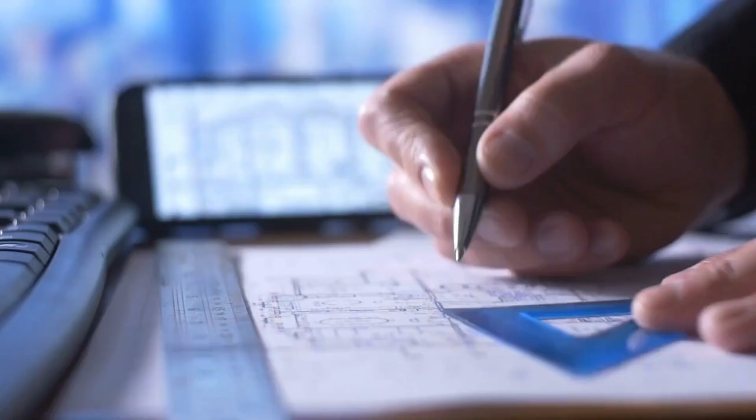Louis Sullivan, an American architect, was the first to popularize the idea that a building's form should be determined by its function. He believed that a building's purpose and intended use should guide its design, rather than just aesthetics.

Take the Guggenheim Museum in New York City, for example. Its unique design was intended to provide a space for visitors to view artwork in a continuous, uninterrupted flow. The building's spiral design allows visitors to walk up and down the ramps without ever having to turn around or backtrack.

Similarly, the Sydney Opera House, designed by Danish architect Jørn Utzon, was created to provide the best acoustics for the audience in its performance halls, rather than just focusing on its aesthetic appeal. The shells, which are the most iconic part of the building, were designed to ensure that sound was reflected evenly throughout the auditorium.

Another example of form following function can be found in hospital buildings. Hospitals have very specific needs, such as separate entrances for ambulances and patients, as well as specialized equipment for medical procedures. The design of a hospital must take into account these needs, while still providing a welcoming and comforting environment for patients.

The Mayo Clinic in Rochester, Minnesota, is a prime example of a hospital building designed with its function in mind. The clinic's design focuses on creating an environment of healing and wellness for patients, as well as providing the necessary medical equipment and resources for staff. The spacious lobby is designed with natural lighting, comfortable furniture, and calming artwork to reduce patient anxiety and promote relaxation.

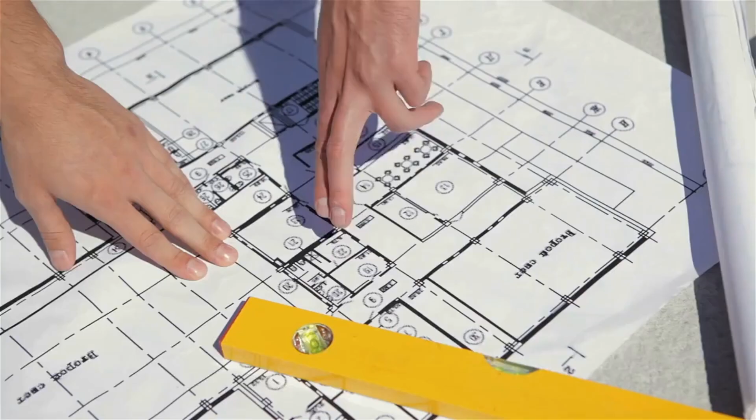In contrast, a poorly designed house may have awkwardly placed rooms or doors that don't align with the flow of the home. This can lead to a feeling of disjointedness and make daily life less efficient and enjoyable.

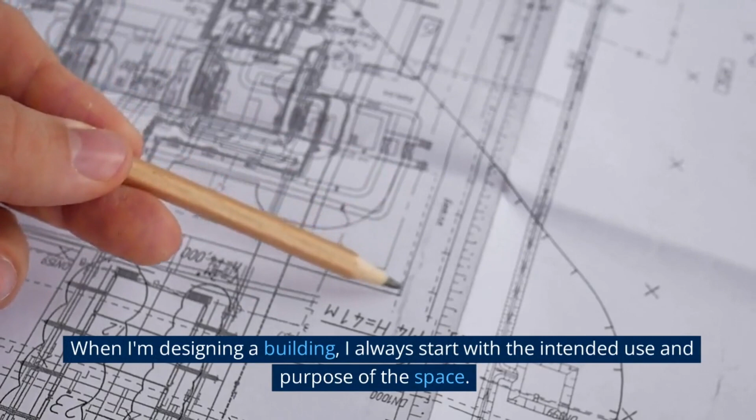Form follows function is really at the core of good design. When I'm designing a building, I always start with the intended use and purpose of the space. From there, I can begin to think about how the space should be arranged and what materials would be best suited for the project.

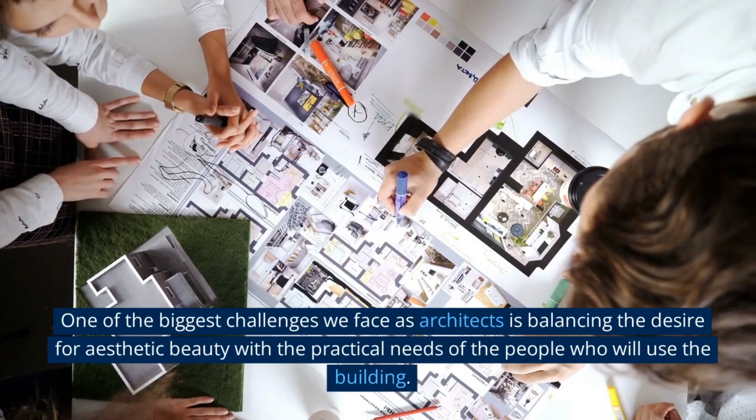One of the biggest challenges we face as architects is balancing the desire for aesthetic beauty with the practical needs of the people who will use the building. It's a delicate balance, but it's essential to create spaces that are not only visually appealing, but also functional and efficient.

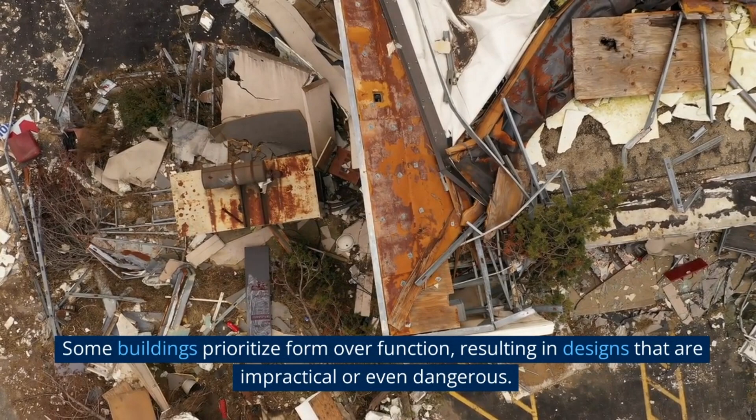Of course, not all architects adhere to the principle of form follows function. Some buildings prioritize form over function, resulting in designs that are impractical or even dangerous. However, it's important to note that form following function does not mean sacrificing aesthetics. In fact, a well-designed building that prioritizes function can often be more visually appealing than one that does not.

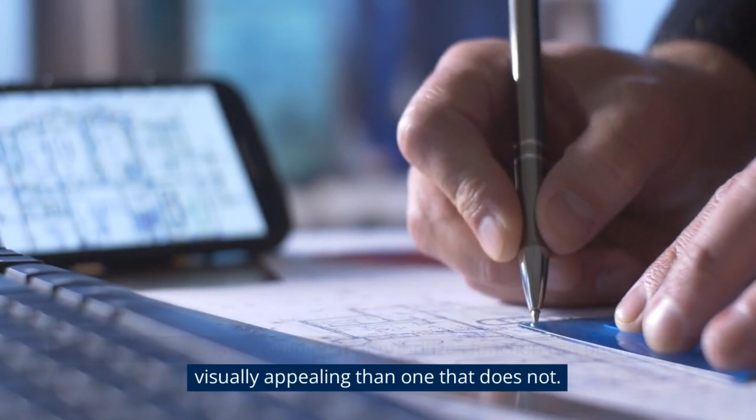By understanding the needs of the space and its users, an architect can create a design that is both beautiful and practical. When you look at a modern building, what do you see? Is it just a structure made of concrete and steel, or is there something more to it?

But first, let's take a step back in time. For centuries, buildings were designed to be not only functional, but also ornate and decorative. Architects would create intricate facades and elaborate interiors to show off their skills and impress their clients.

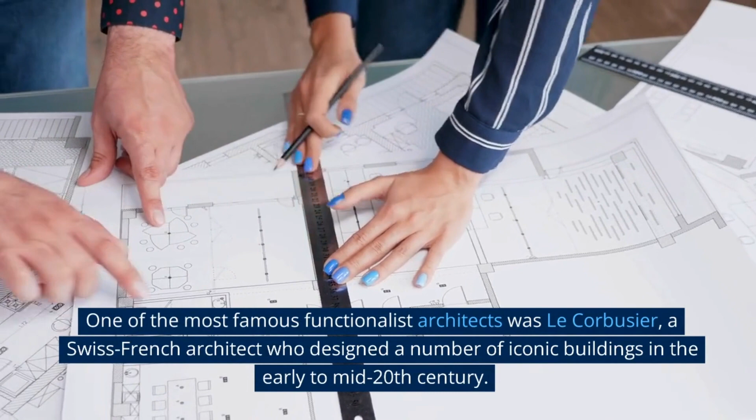But in the early 20th century, a new approach emerged. Functionalism, also known as the International style, emphasized the use of simple forms and industrial materials to create buildings that were efficient, practical, and affordable. One of the most famous functionalist architects was Le Corbusier, a Swiss-French architect who designed a number of iconic buildings in the early to mid-20th century.

His designs were characterized by clean lines, open spaces, and the use of industrial materials such as reinforced concrete and steel. One of the key principles of functionalism is the idea of open space.

Rather than dividing a building into separate rooms and compartments, functionalist architects preferred to create large, open areas that could be used for a variety of purposes. Another important element of functionalism is natural light.

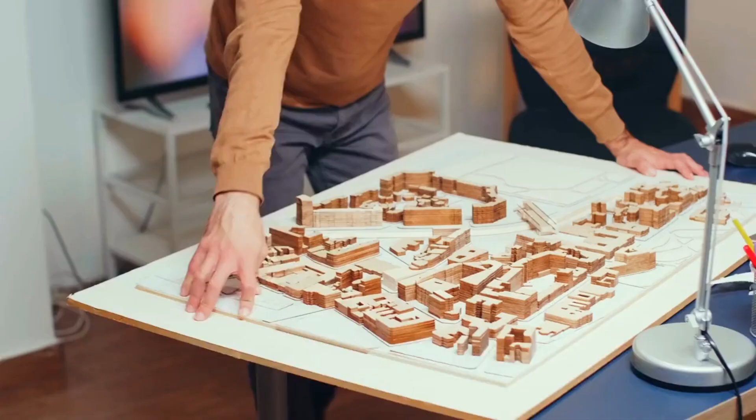By using large windows and skylights, architects could bring in plenty of natural light, reducing the need for artificial lighting, and creating a more pleasant and comfortable environment. Functionalists believed that architecture could play a role in improving society by creating buildings that were better suited to modern life. Flat roofs are also a hallmark of functionalist architecture.

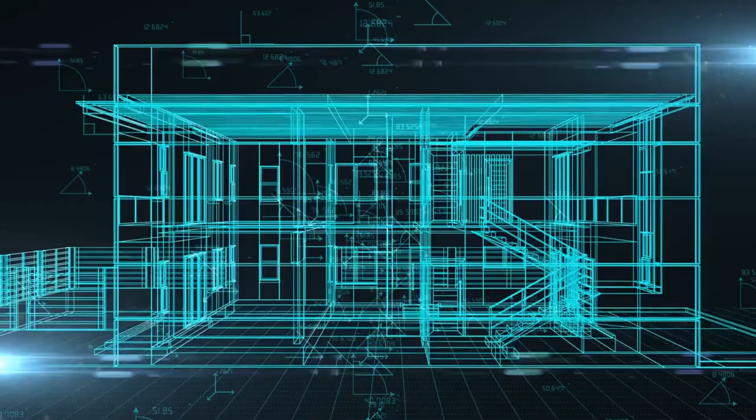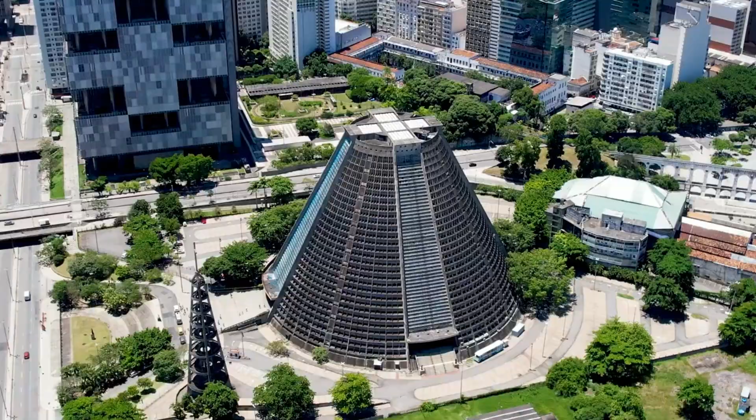By eliminating traditional pitched roofs, architects could create more usable space on top of the building, as well as a more streamlined and modern appearance. Functionalist architecture is characterized by a minimalist aesthetic. Rather than using ornate details and decorations, functionalist architects preferred to let the building's structure and materials speak for themselves.

From open space to natural light to minimalist design, these ideas have had a profound impact on the way we think about buildings today. Postmodernism emerged in the late 20th century as a response to the perceived limitations of modernism, which was characterized by a focus on functionalism, simplicity, and a rejection of ornamentation. Postmodernism sought to break free from these constraints and embrace a more eclectic and playful approach to architecture. Postmodern architects were inspired by a wide range of styles and historical periods, and they often combined elements from different styles in unexpected ways. Postmodern buildings are often characterized by their use of color, ornamentation, and historical references.

One of the most famous postmodern architects was Robert Venturi, who argued that less is a bore, rejecting the modernist belief that simplicity was the key to good design. Venturi and other postmodernists sought to create buildings that were more expressive, playful, and accessible to the general public.

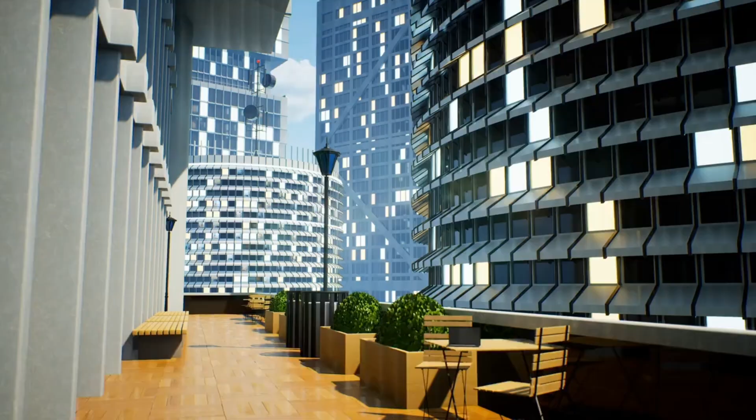Postmodernism had a significant impact on architecture in the late 20th century, and its influence can still be seen in many buildings today. Postmodernism challenged the notion that there was only one right way to design a building, and it opened up new possibilities for architects to explore different styles, materials, and forms.

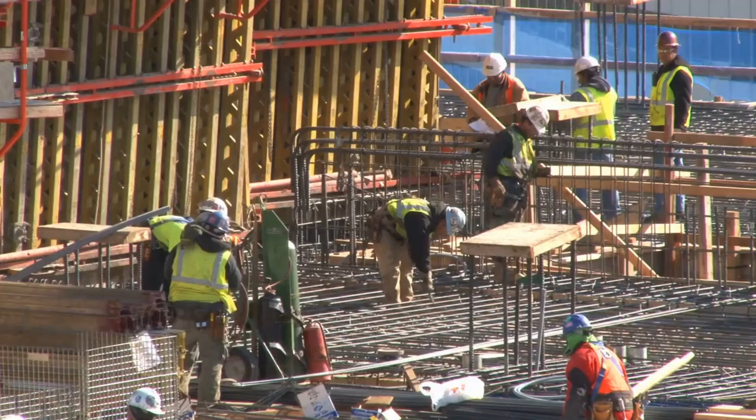However, postmodernism also attracted criticism from some architects and critics who saw it as superficial and lacking in substance. Some argued that postmodernism was too focused on aesthetics and failed to address the social and environmental issues that architecture should be concerned with. Despite these criticisms, postmodernism remains an important movement in architecture, and its legacy can be seen in many of the buildings that define our cities today.

Whether you love it or hate it, there's no denying that postmodernism has had a significant impact on the way we think about buildings and the built environment. Postmodernism had a significant impact on architecture in a number of ways. Here are a few of the key ways in which postmodernism affected architecture.

A renewed focus on aesthetics. Postmodern architects rejected the idea that architecture should be purely functional, and instead emphasized the importance of aesthetics and visual appeal. Postmodern buildings often feature bright colors, playful shapes, and decorative elements that are meant to be visually engaging and interesting.

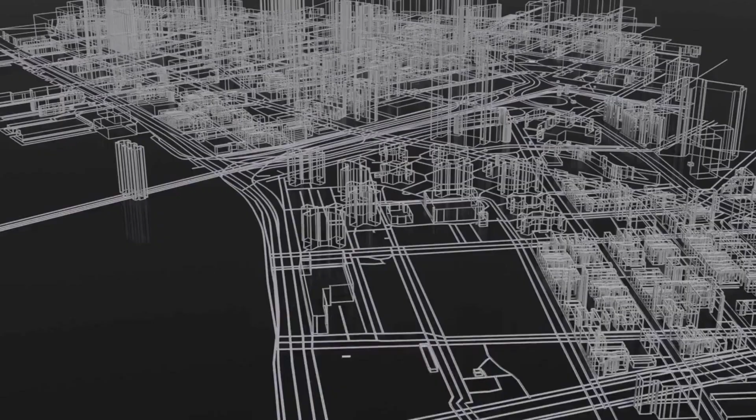A willingness to mix styles. Postmodern architects were not constrained by the idea that buildings should be designed in a single, unified style. Instead, they often mixed elements from different historical periods and styles, creating buildings that were eclectic and visually interesting.

An embrace of ornamentation. Postmodern architects rejected the modernist belief that ornamentation was unnecessary and superficial. Instead, they embraced the use of decorative elements, such as arches, columns, and moldings, that were often inspired by historical styles. A focus on symbolism - postmodern architects often incorporated symbolic elements into their designs, using architecture to make a statement about society or culture.

For example, some postmodern buildings feature elements that are meant to represent social or political ideas, such as freedom or democracy. A new approach to urban planning - postmodernism also had an impact on the way that architects and urban planners thought about the design of cities.

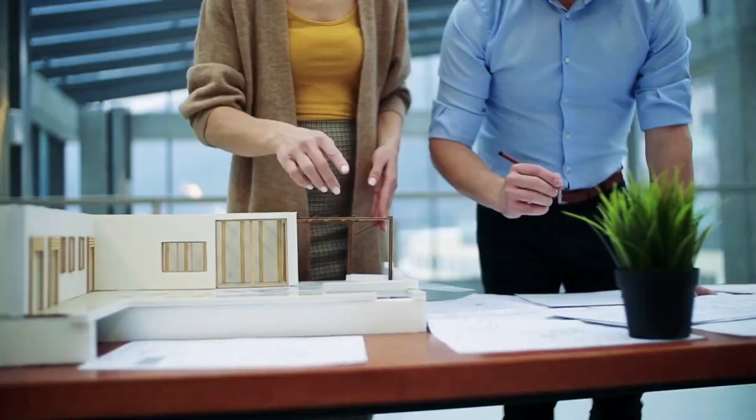Postmodern architects were often critical of the sterile, uniform environments that had been created by modernist planning, and instead sought to create urban spaces that were more varied and engaging. Overall, postmodernism had a significant impact on architecture, challenging traditional ideas about what buildings should look like and what they should represent. While some of the more extreme examples of postmodern architecture may be polarizing, it's clear that postmodernism helped to broaden the range of architectural styles and approaches that are considered valid and important.

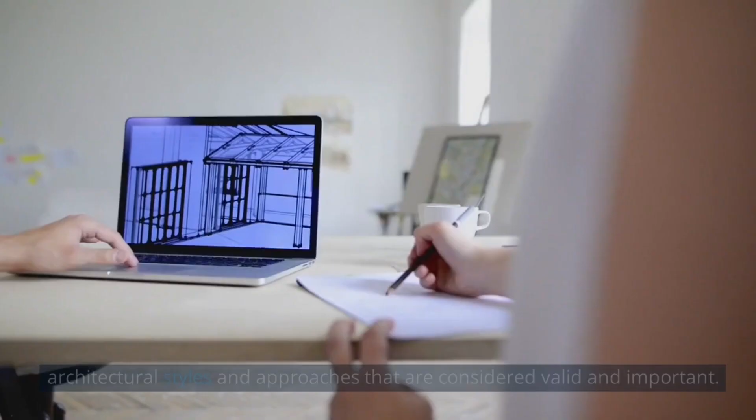One way in which postmodernism and functionalism intersect is in the idea of form following function. Both functionalists and postmodernists believed that buildings should be designed to meet the needs of their intended purpose, and that the form of the building should be determined by its function.

However, while functionalism emphasized simplicity and clarity in design, postmodernism embraced complexity and diversity. Postmodern architects often used ornamentation and historical references to create buildings that were visually engaging and interesting, even if they were not strictly necessary from a functional standpoint.

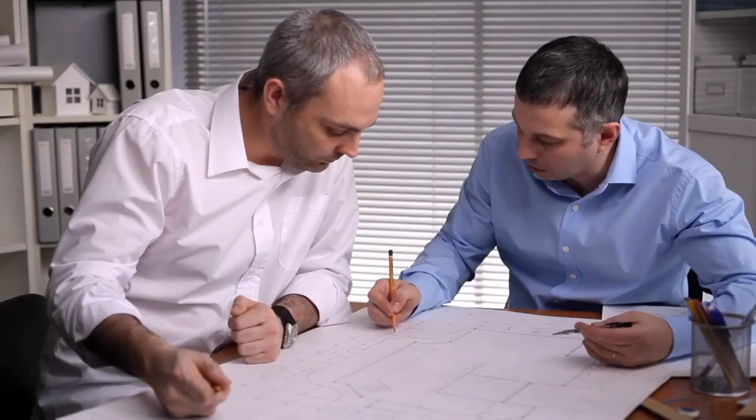In some cases, postmodernism also challenged the idea that function should be the primary driver of architectural design. Some postmodern architects sought to use architecture to make a statement about society or culture, using symbolism and metaphor to create buildings that were more than just functional spaces.

So while there are some areas of overlap between postmodernism and functionalism, they are ultimately two distinct architectural movements with different goals and priorities. Postmodernism's emphasis on aesthetics and ornamentation represents a significant departure from the functionalist ideals of simplicity and clarity.